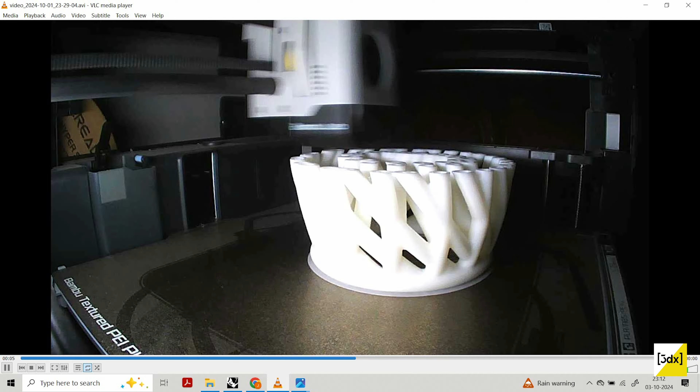In this video we are going to see how to make the structure which I 3D printed using Bambu Lab 3D printer, which is really good. I tried it, this was my first time using this printer. It was my friend's printer, so I just tried to use it, and you can see the print as it is, the printing process time lapse. It's just a 10 second time lapse, but the quality is really good.

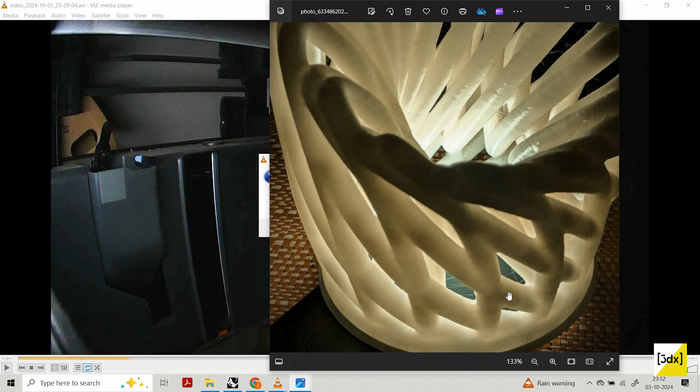So we are going to see how to make this structure in Rhino as well as Grasshopper. You can see in this photo, the curves have been interlocked, I mean the meshes have been interconnected. There's a lot of ways to do it.

In this one way, we are going to create a structure in Rhino, then extract the curve from the structure, then create a mesh for the curve. But instead of creating this mesh manually, we are going to use a plugin. You just need to go to Food4Rhino and download this plugin called Chromodoris. This is a plugin which allows you to do iso surfacing. Iso surfacing is the major use of this plugin, which I will show in the process of making this model, because if I just explain it in words, I think it's very difficult to understand.

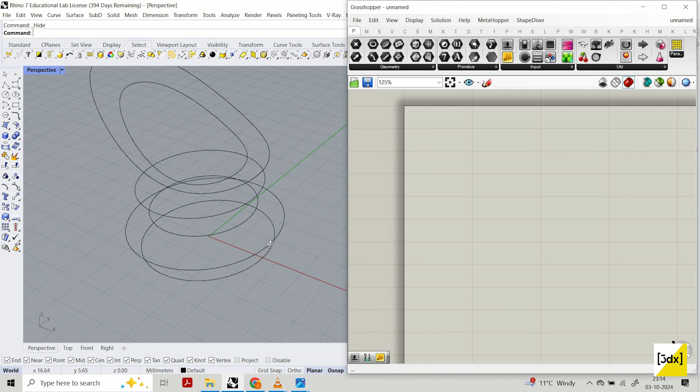So I created the curves, because I recorded this video a lot of times and it got messed up in between due to a lot of reasons. So I'll just keep this curve like this, and now I'm going to use this curve to create a loft.

If you don't know how to make this, it's so simple. Take a circle, create a curve - I mean the curve is called a circle - and then use Shift plus Alt, which allows you to scale. Shift allows you to scale in both axes, and Alt gives a copy of it, and then you can move it. So these four circles you can do easily.

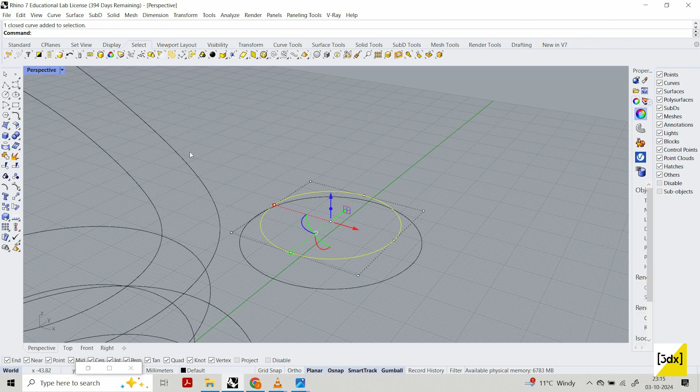But when it comes to this circle, it's a curve which has been derived from a circle. When I use a normal circle here and use the control point to move it, you can see it's not like this. You might be thinking, what did I do so that this curve, when I move it, resembles this.

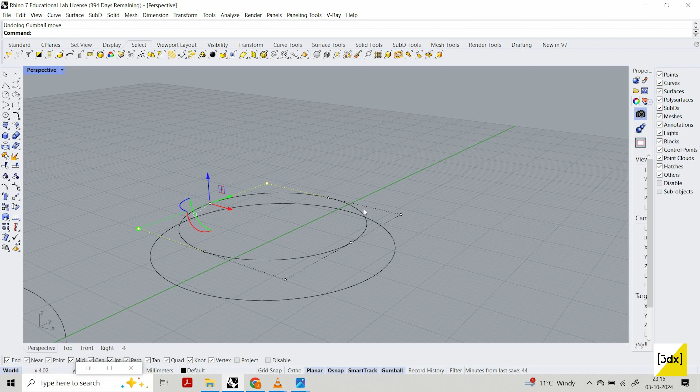I used to call all the 2D lines as curves, so don't mistake me, you might be thinking why I'm calling the circle a curve. In this curve, I'm just going to use rebuild. In rebuild, you get an option where it rebuilds the curve with a fixed number of points - it creates a NURBS curve, like it turns the circle into a NURBS curve where we can alter the shape with the control points freely.

You see here the 'Make SubD friendly' option - the model I'm going to do, you can also do it using sub D, but I'm not going to use sub D now. If you want to know more about sub Ds, I've posted a lot of videos about this. With the same technique you can do this model - two videos before I created a facade using a component called bridge, with that component you can create this model. I also post a lot of videos about Rhino basics, if you want to learn you can learn over there.

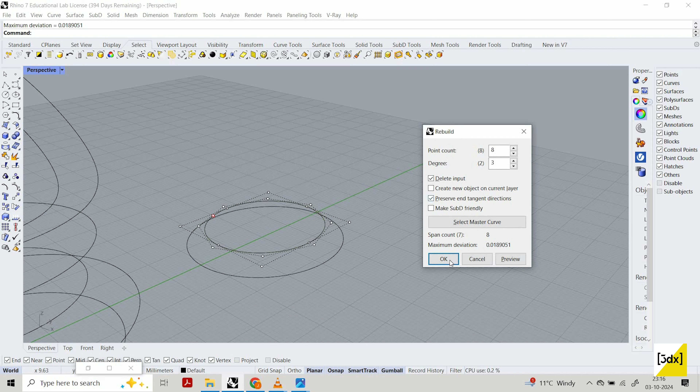So you rebuild it now, and you get 8 points. And now when you use the control point, you can see there is no pinch - we used to call this kind of sharp thing a pinch.

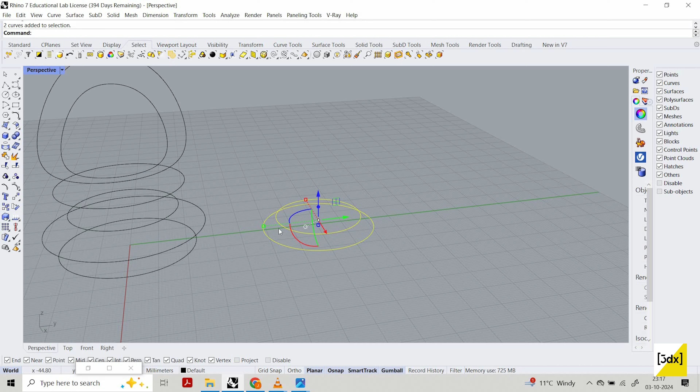It creates a pinch, like a sharp, it's not smoother. So I just rebuild the curve to make it the way I want. So we have the curves, a set of curves.

So now I'm going to give a loft over here, like 1, 2, 3, 4, 5, 6. If you look carefully, the loft path has been created based on the selection which I did. I selected this curve first, then second. So it's based on your manual selection. Same in Grasshopper, it's based on the order of the curves you insert into the loft input parameters. Okay. So when I give it, it creates a shape.

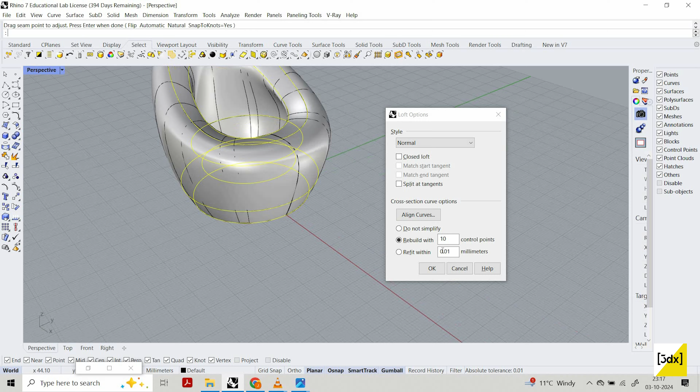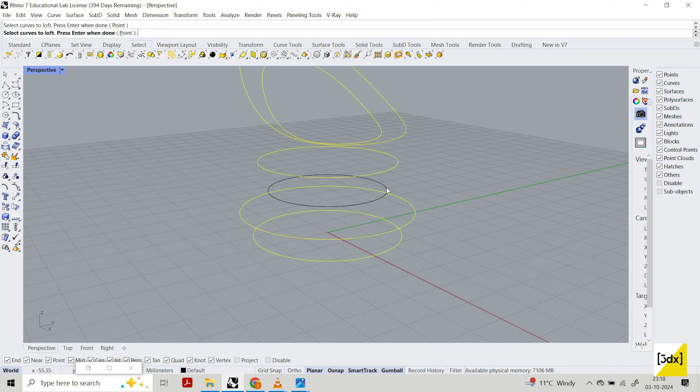This is really good. But if you see here, these are called isocurves, or a seam. For example, when we use loft like this, you can see this is a path or a seam. It shows the seam of every curve which we selected, the direction of the seam. Instead of using a loft command, you can use a polyline and trace this out, and use the Sweep 1 or Sweep 2 component to create this. So that is one possibility, the first thing.

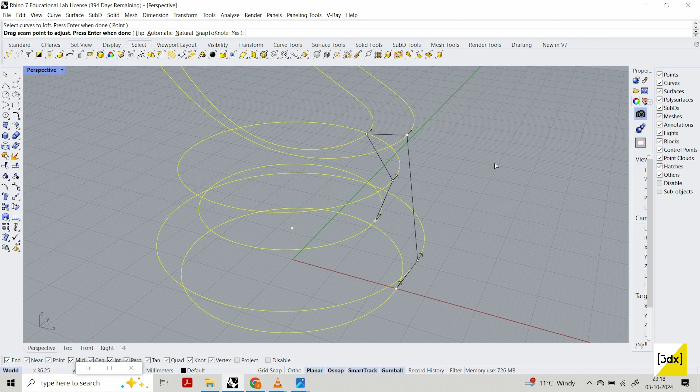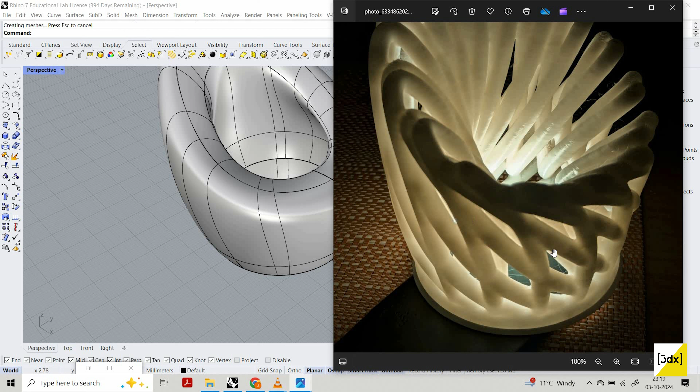The second thing is, if you see the isocurves, they're going the way of the seam. So in this model, if you see the linear pipes, a pipe kind of structure, it is none other than the isocurves, which we are going to extract from Grasshopper later. But this one doesn't match over here, so I want this to be more fluid.

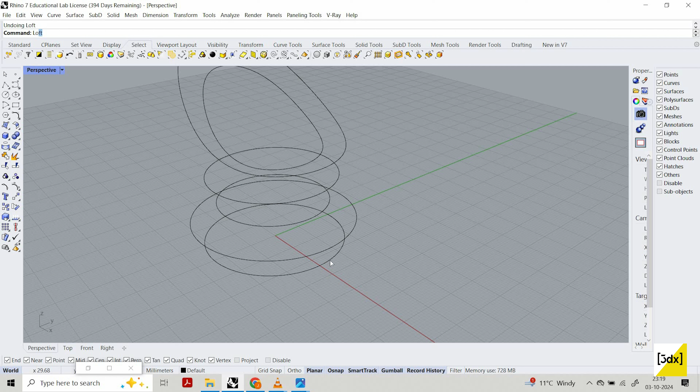In Grasshopper, we get multiple options: when we adjust some parameters, the model will be altered. In Rhino also there is an option called Record History, which will allow you to do the same process to a certain extent, not fully like Grasshopper. So now I'm going to do loft again. I can see the loft over here. The surface is created. Yeah, that's good.

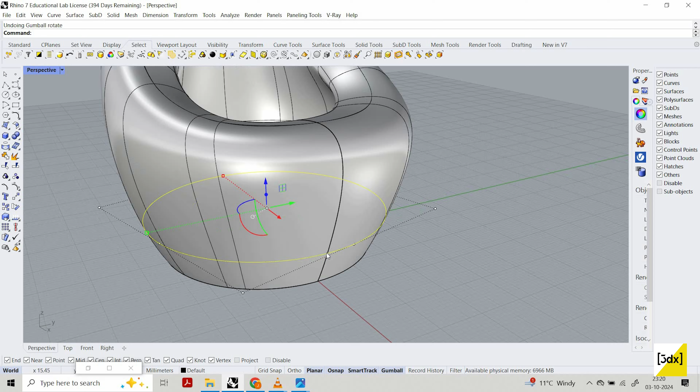Now, when I select the curve which I used to create the surface and turn it, you can see the surface seam has been turned. The seam has been changed based on the curve, because on this surface the seam is over here, you can see a dark line. All the seam points are over here. So when I move it, I'm altering the seam point, so all the isocurves have been altered. So I'm going to do this for every other curve.

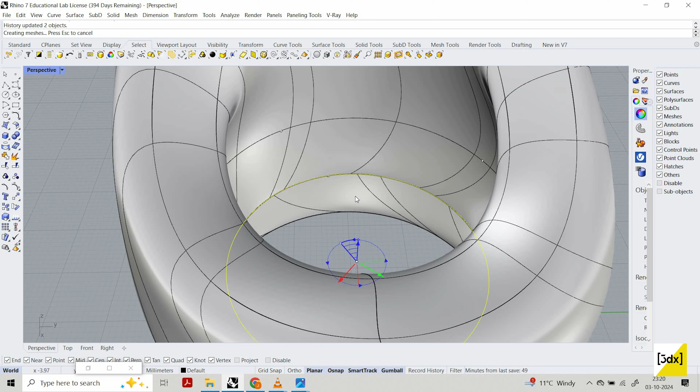Okay. So you can alter based on your needs. I'm just trying to tell you about the process behind the creation of the model. You just need to understand the process, and you can create your own model, your own concept. You can also create a better model than what I create, better ideologies. So it's just a step and understanding of each and every process.

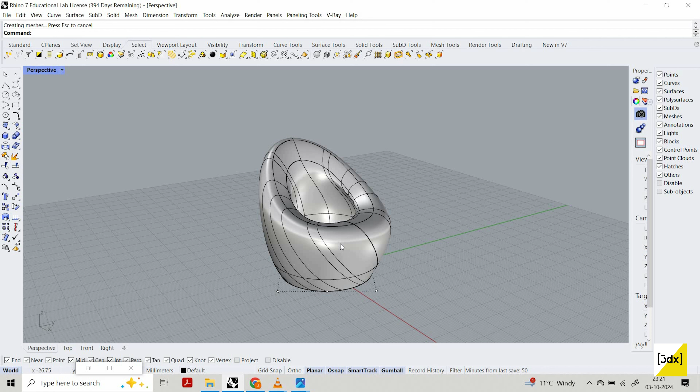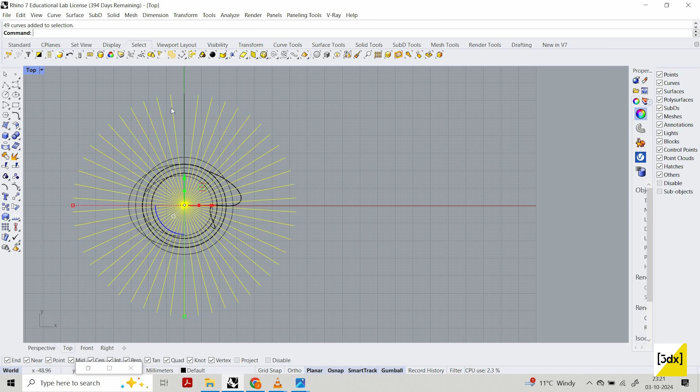So now we got this. In Rhino, usually what you can do is use a line over here, then use polar array. Then select last created. Then move this curve. Then project.

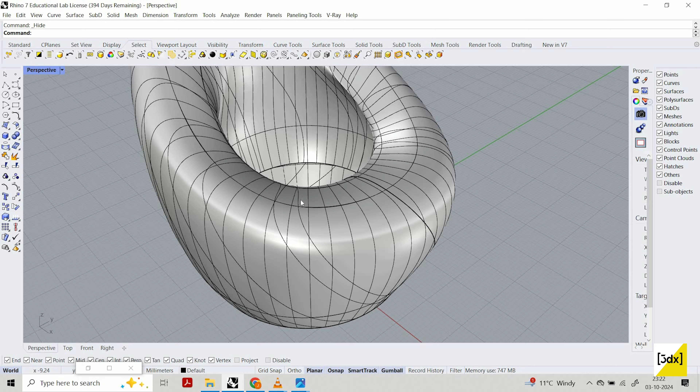So you can see when I do this, the curve is projected directly to the surface, which is good, but it doesn't follow the isocurve. The curve which we really want is a curve like this one.

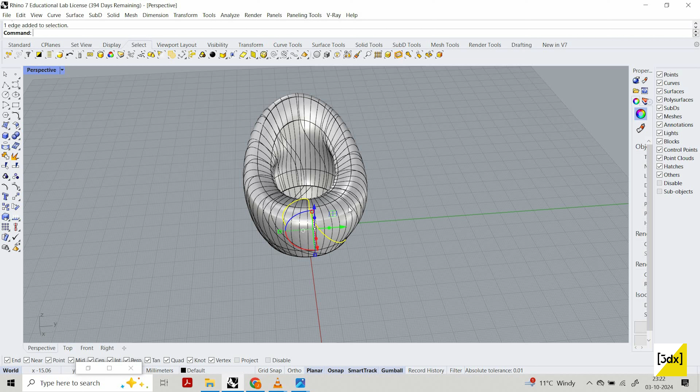Sorry. Yeah. So the curve which we really want is this curve to be created all over the surface, like a contour, but in this axis. So when you use a contour command, it creates a contour. If it's a flat surface, it's okay. If you use contour over here also, it creates like a flat one. But in this case, like a NURBS curve, you want not a regular curve. So how do we create this kind of curves all over the surface?

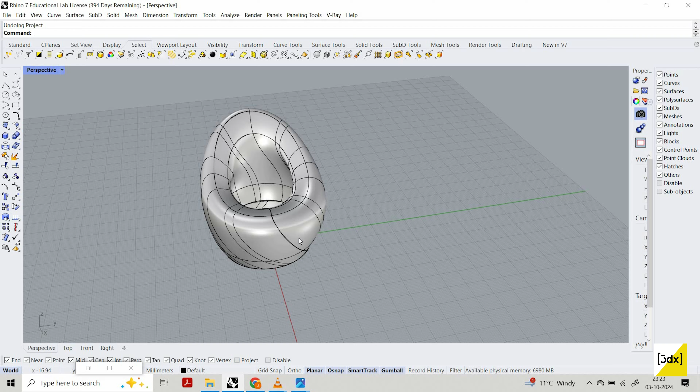So in this case, I will use Grasshopper, which I felt more comfortable with. There are processes to do the same in Rhino as well, but I use Grasshopper. My working style is I do certain things in Rhino and certain things in Grasshopper. There are some things which are easier in Rhino, and some things which are easier in Grasshopper. You just need to blend the workflow.

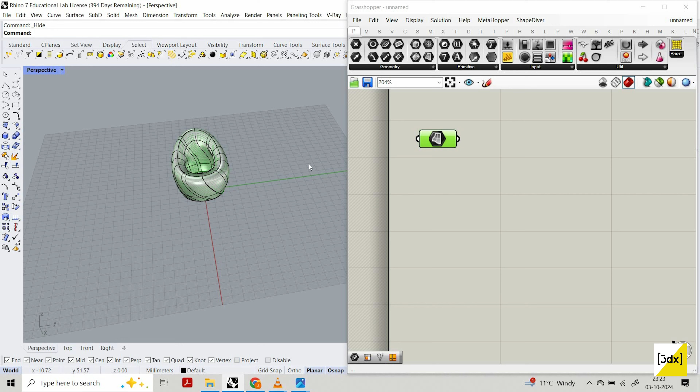So I'm going to use isocurve over here. Isocurve takes a surface and uses the UV point to create the curve. Okay. So we need to create the UV point between 0 to 1, and we need to make this value recognizable with the surface. So for that we are going to reparameterize this surface.

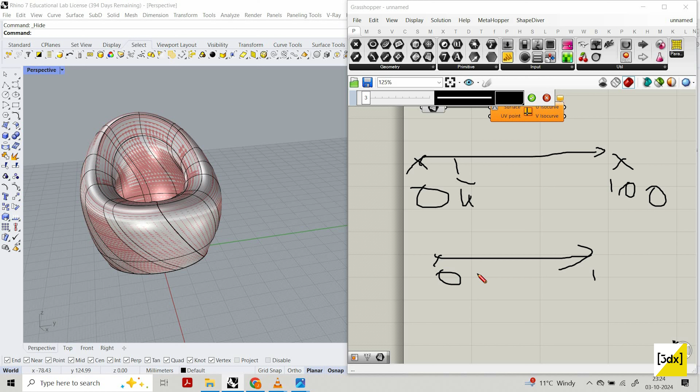Reparameterize is nothing but normalization. So if you have 0 to 100, the value will be reparameterized to 0 to 1. So if here it's 10, then here it's 0.1. If it's 20, then 0.2. 30. So whatever value it has, it will be converted into the 0 to 1 domain.

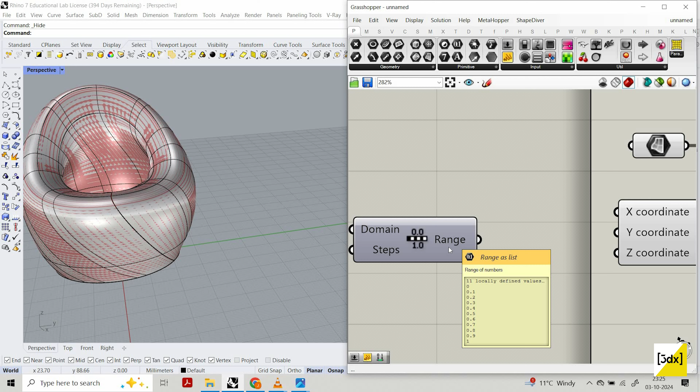So now we are going to use construct point, and now we are going to use range. In this range, if you see, the domain is 0 to 1. By default it has 10, but I'm also giving 10. So it creates values of 0.1, 0.2, 0.3. So now I'm creating the point on the y-axis, and when I connect it, you don't see anything. Yeah, but okay. I just move this like this.

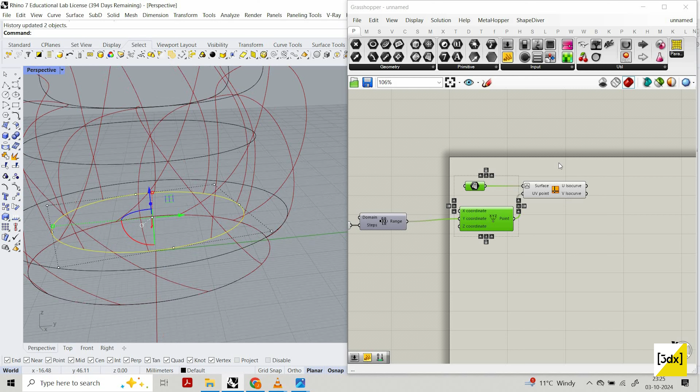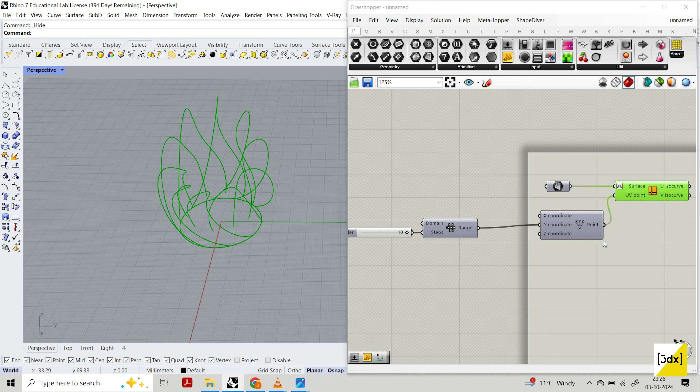So when I select the isocurve, you can see the curves are being created based on the seam of the surface. Let's hide this. You can see the curves have been created based on the seam of the surface. This isocurve process is used when you do non-planar 3D printing. If you want to create a curve on a non-planar surface, or a non-planar tool path for 3D printing, then isocurve is the best option for that. So now you can increase the value from 10.

I don't know, on my keyboard my delete option is not working, so I'm not deleting it.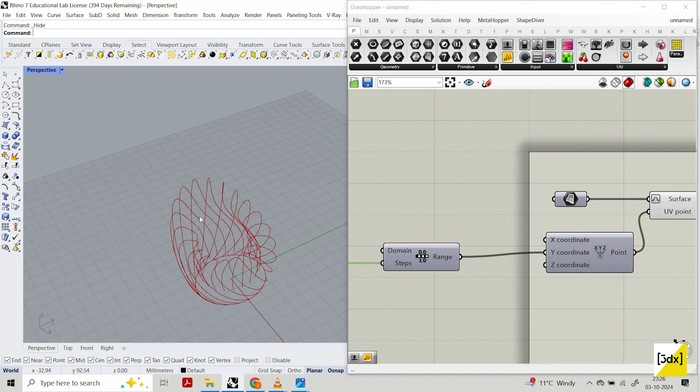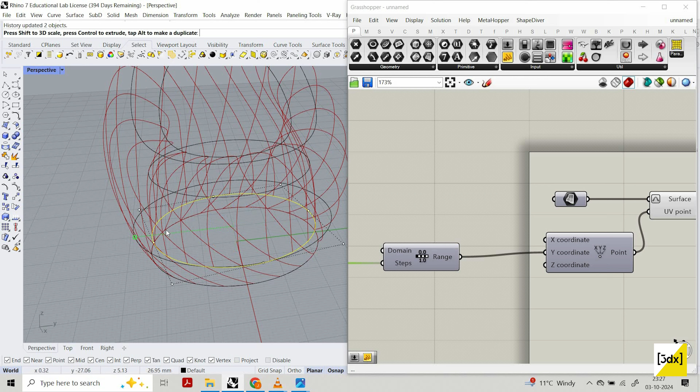So you get around 20 curves based on the seam. So what I'm going to do is hide the surface, and I'm going to use this curve to edit it because the record history is still on. Sorry. I'm going to hide this now. So you can see the record history is still on. So I can edit it this way, and it's easier to visualize what is there and what is needed. So now we got this curve. Let's keep it aside, okay?

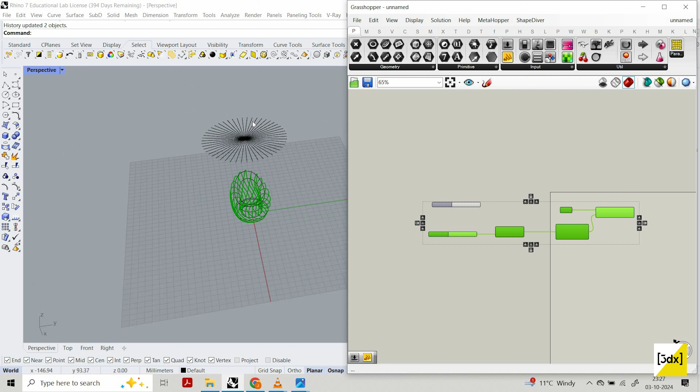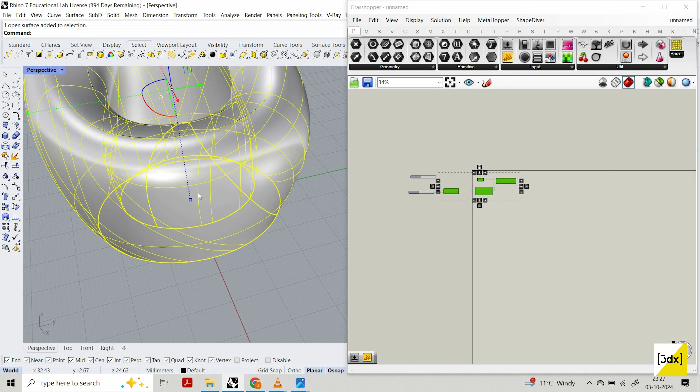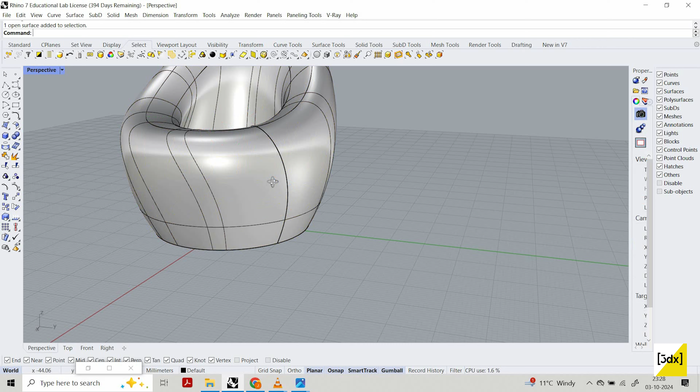So now I just internalize this and I'm going to hide this. Now the one I created, I'm going to delete it, as I said before, because my delete key is not working. I don't know why. So now I'm going to create the loft again. Turn the record history on again. Okay. So you can see the seam is over here. So I'm going to use the same process.

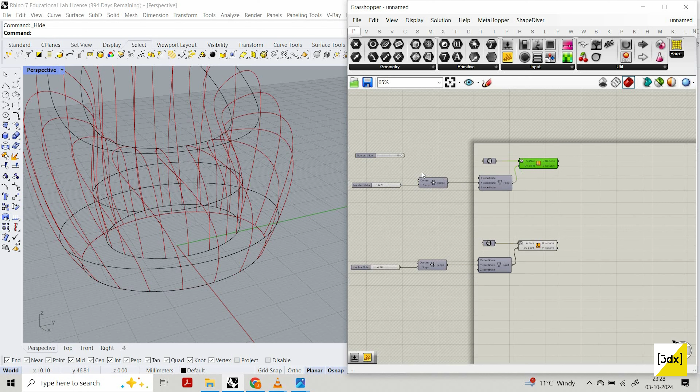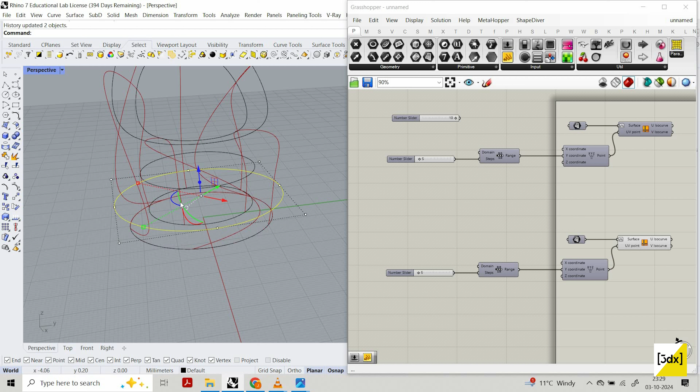Set one surface. Let's hide this for now. So for now, I just keep 5 here to see the formation of the curves properly, as well as 5 here. So now I'm going to move this. It's so cool. You can move the seam however you want. You can also alter the seam based on your needs. Okay.

So now I'm going to use 20. Let's hide this for now. So now we have two sets of curves.

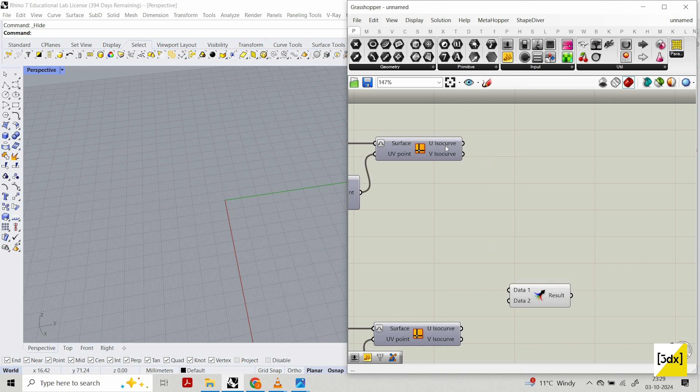So you can see one curve we created is going from here. The other curve is going like this, for example; one curve is like this, the other curve is going like this. Technically, you can also create this entirely in Grasshopper, but I just want to show the interface between both the elements.

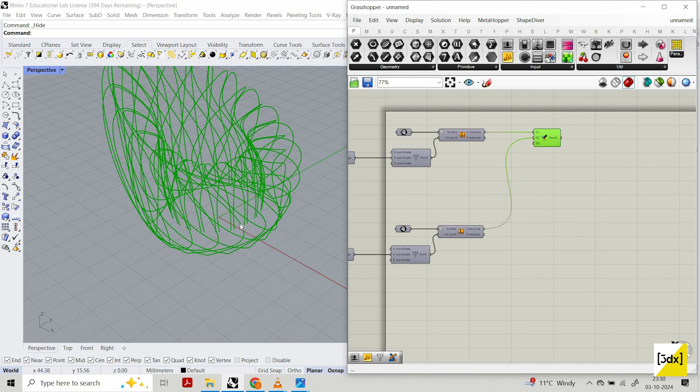Sometimes I like to edit my model manually in Rhino, so at this time I use Rhino. It's up to your thought process, okay? I'm just trying to teach you the concept behind this. So now I got the curves.

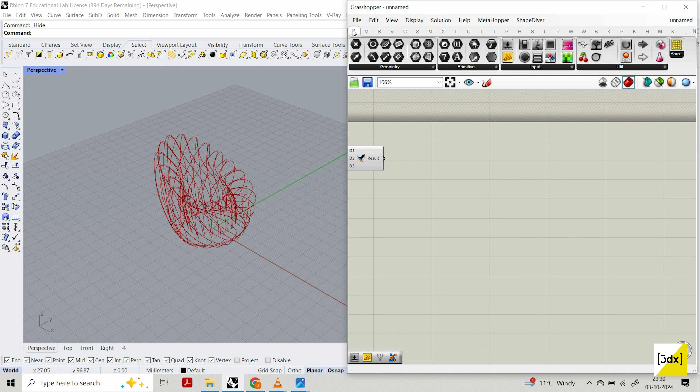Now I am going to do, where is the component? Yeah, here it is. So let's take this, okay? Now I'm going to divide it. I'm going to divide the curve based on the length of the curve. So let's take the length and divide, let's say x by 2. So whatever length it has, that number by 2.

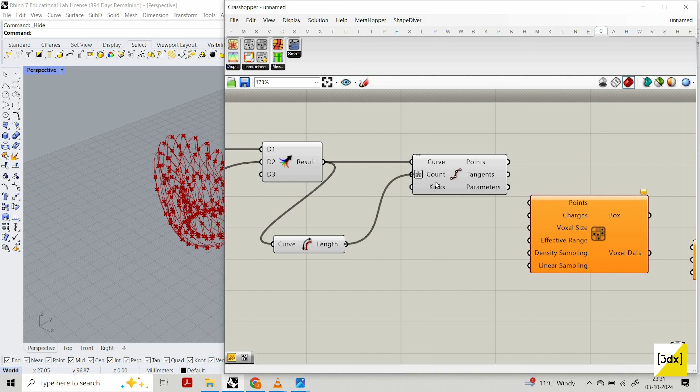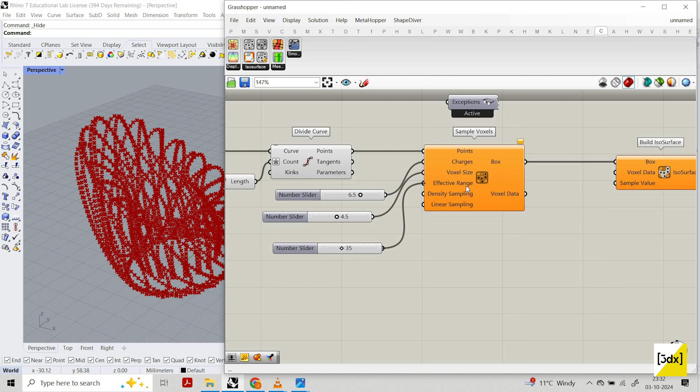So I'll just give a random value of 6.5 and 4.5 and 35. So now you see it looks like a bounding box. Okay. Now I'm going to flatten this, so it's like a single box.

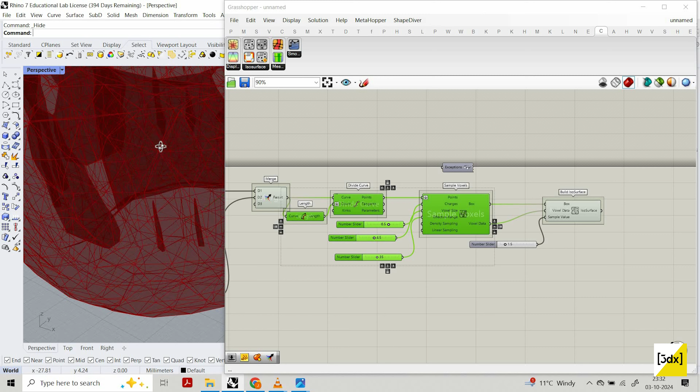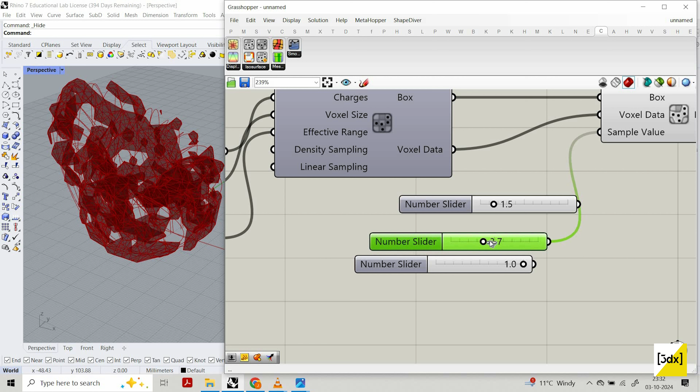Now I'm going to use this voxel data here. I'm going to use 1.5. So you see a big voxel. Now I'm going to do 0.5 maybe. So 2.5. So here the voxel is being connected. Now I'll just increase the point and I'm just playing around. So technically what it is doing is with every point.

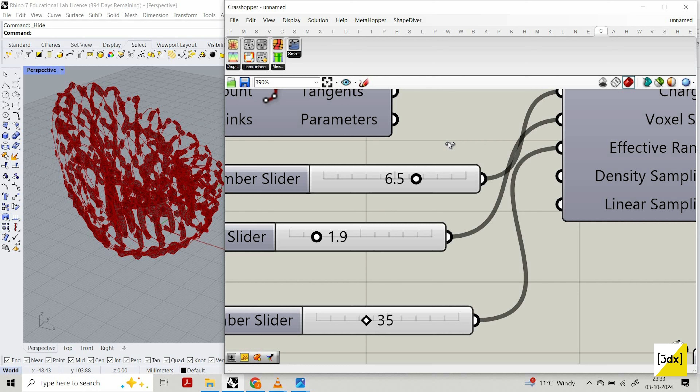Just a minute, my laptop is hanged. I should have explained first before doing it, but I thought first visually. So yeah, now I can move my mouse.

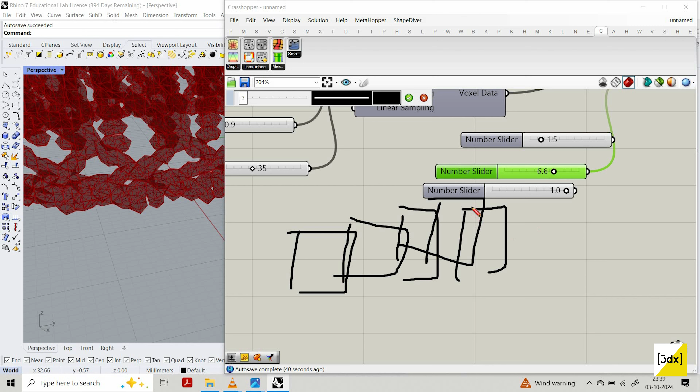So you can see this Sample Voxels uses the points, for example like a pixel. If there is one box, this generates a box, the voxel. Just imagine voxel as a box for now. So it generates a box. And this one, Build IsoSurface, combines all the boxes and creates a surface. So this is more helpful when you want to model something like this.

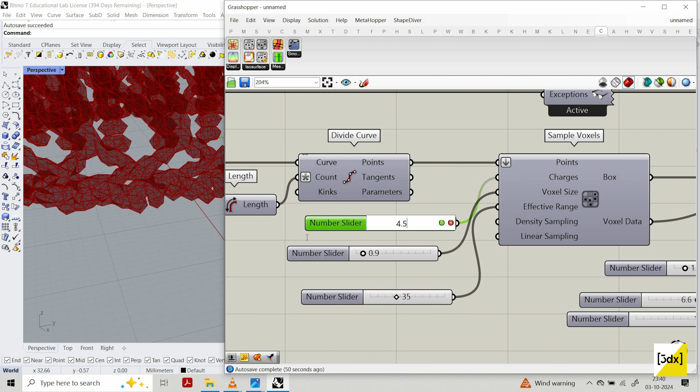It takes more time. I'll try to get a value where I can achieve the final output. Maybe I can compute. Just wait a second. It takes some time, I'm so sorry. Yes, I'll edit this part. Okay, so now it's been loaded.

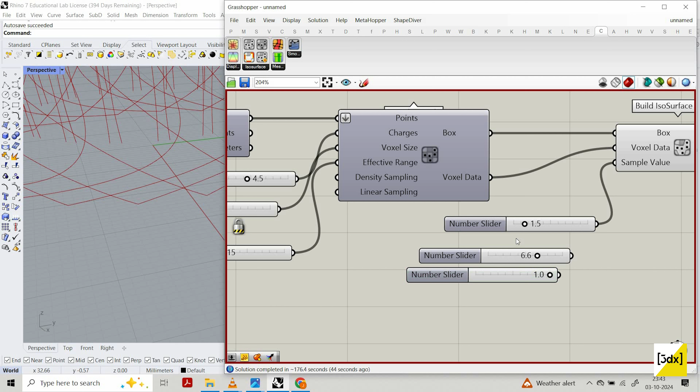So let's lock it. Let's give a value 1.5, 15. I'm just using the value from the old model which I did because I don't want to waste your time. In the recording it takes more time because my laptop is not that powerful.

So for example, you can create your own simulation, you can create a random curve and you can voxel this. There are a lot of other plugins, but I feel this one is a little more interesting and clean with the mesh, especially for 3D printing. The mesh it provides was really suitable for 3D printing. So I like the output, that's why I'm using this.

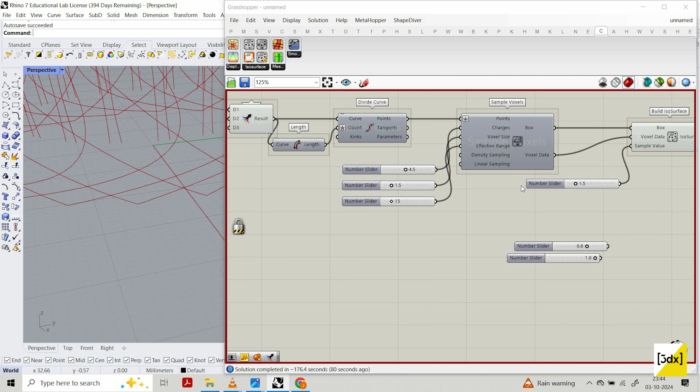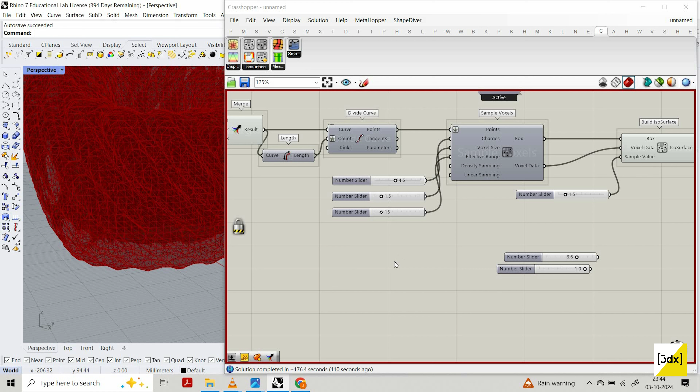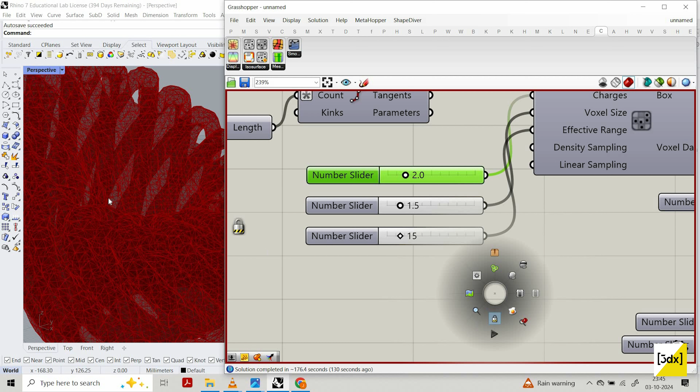So let's try to compute. Okay. Not bad, but I want some gaps. So what I'm going to do is, my keyboard is not working a lot of times, 3.5. Let's try to compute it. It's too much, maybe 2.5. Compute it. 3. So I computed.

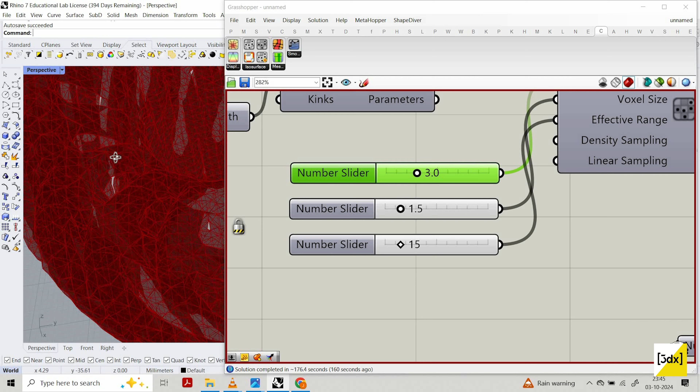Okay, not bad. Okay, so now what I'm going to do is smooth mesh. I'm going to use this over here, and then I'm going to use Catmull. So Catmull, if you don't find it, it's a plugin, another plugin called Weaverbird. So you just need to, but smooth mesh is like

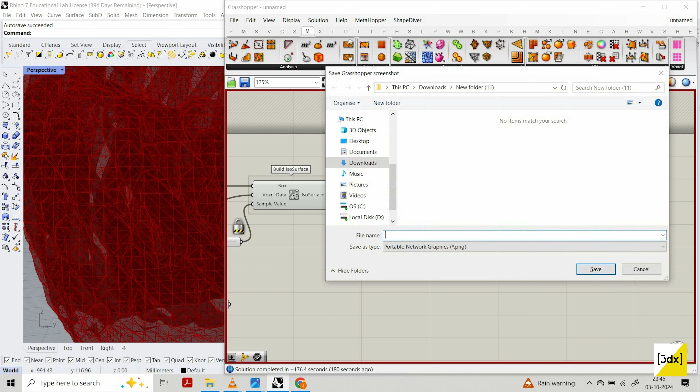Sorry. So if you go into Mesh, you will find it in Utilities, Smooth Mesh. And if you don't know how I did it, Control plus Alt and then press the component, you will know where the component is placed in the above toolbar. So now I just need to connect this mesh over here.

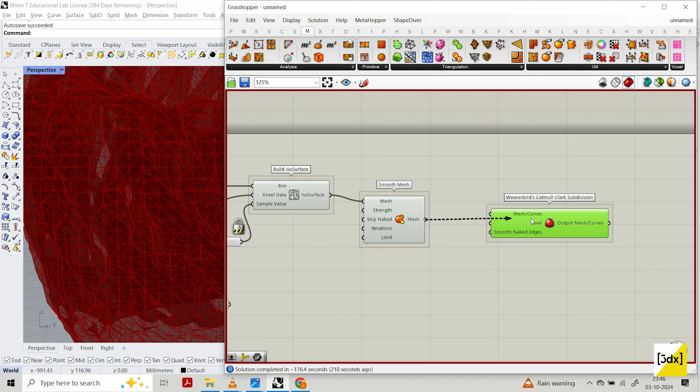Let's hide everything. So technically what I'm doing is I'm just pausing the solver, do the changes. So when I move, it won't be running. It will be paused. So I just manually need to enable the compute. So I change it, I recompute. I change it, I recompute. So in this case, it's so helpful.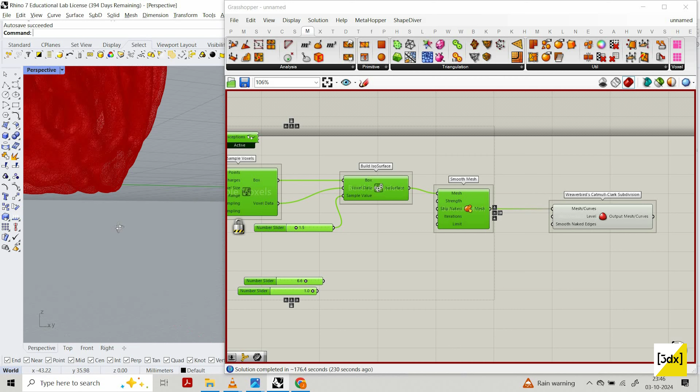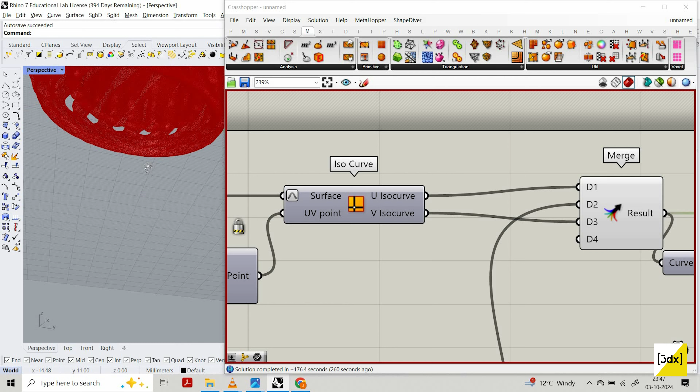So now we got not exactly the same, but it's not that bad. But at the same time, I just want the curve. I just recompute it. So it creates a bottom. You can see here, it creates a bottom. Okay. If you want, you can also add this over here.

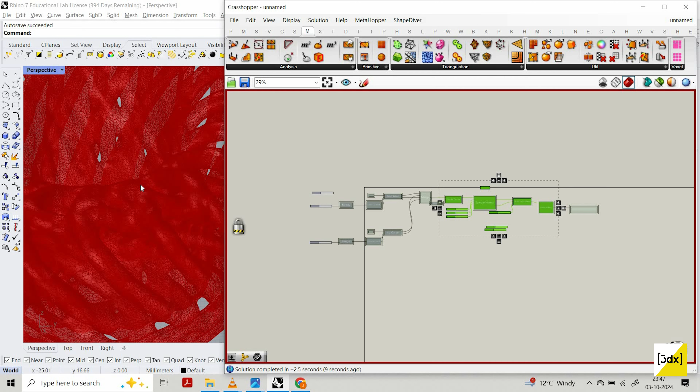Recompute. So in this case, when I'm moving, the component is not processing, so I can move freely. But when you don't do this, sometimes the mesh rendering or the process will be running in the background. Sometimes it makes your system slower.

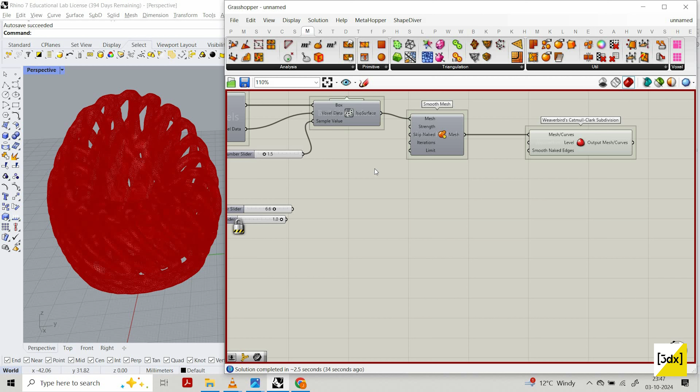So when I work on a script which is placed across the entire screen, I just use this process because after some time, even if it doesn't have that much data trees, or if you are cleaning everything also, it has a lot of components, it has a lot of processing. So I always manually recompute it. That's my way of approach. A lot of people used to do this. You can also try it and let me know.

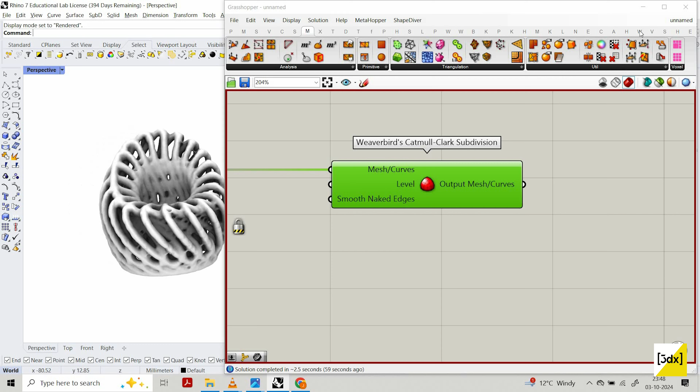So now let's try to bake it. Bake. So okay. Let's see. Okay, so this is the model which we created. What do you think about this? I like it, but I don't know about your opinion. This is not the same as what I created, but it looks better for me.

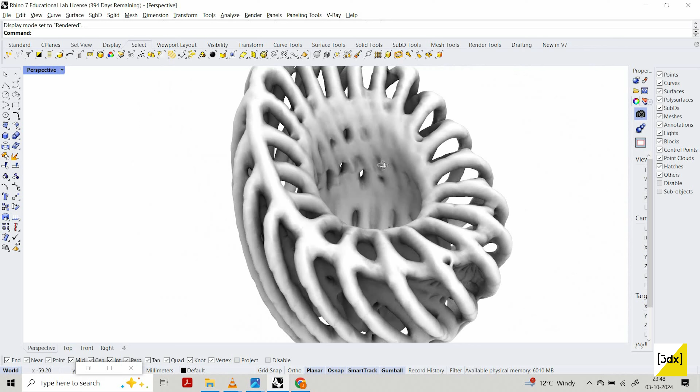So you can also close the bottom. If you want to keep it as a pen stand, then you just create a surface over here and then you can connect it with the mesh. So after this, what you need to do is select the mesh file, export selected. You need to save as STL. It is STL.

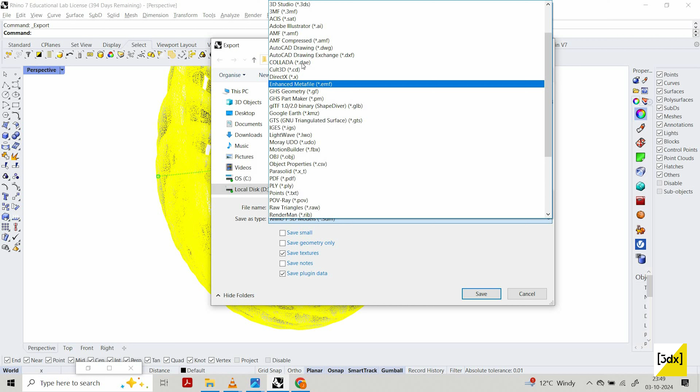Yeah. So STL file. With this STL file, you just need to drop this file into a slicer, like a slicer called Cura, or Simplify3D, there are some slicers in the market. Simplify3D is a little more expensive. For the starter, you can use Cura. So you just need to explore. It's very simple. You'll just learn it after you use it step by step. So that's the way I used to learn. Okay.